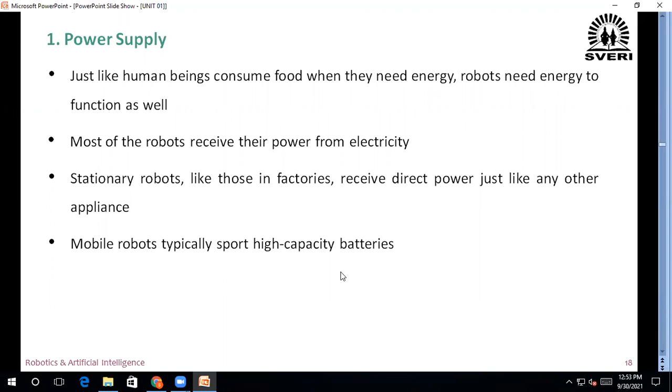Now you know that many students take part in various competitions, that is robotic competitions. Therefore, they are using these small wheeled robots, and for that they are using small batteries.

Then robotic probes and satellites are generally equipped with solar panels for harvesting energy from the sun. This solar energy is also used to drive the robots.

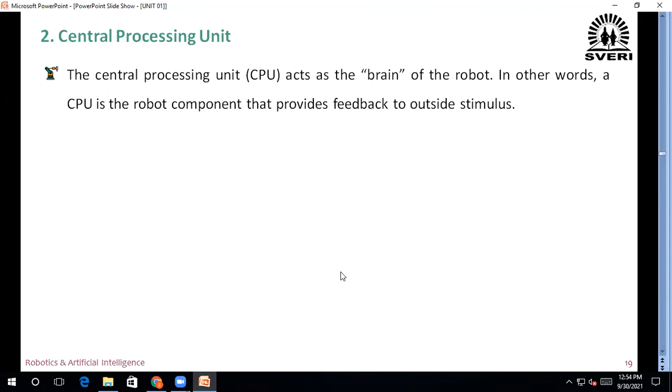Now next is the central processing unit. The central processing unit acts as the brain of the robot. In other words, a CPU is the robot component that provides feedback to outside stimulus. All organisms function and survive by using feedback.

It's what causes us to whip our hand away after we have touched a hot stove. The CPU in a robot takes in environmental data using sensors and then calls on its programming to perform the appropriate action.

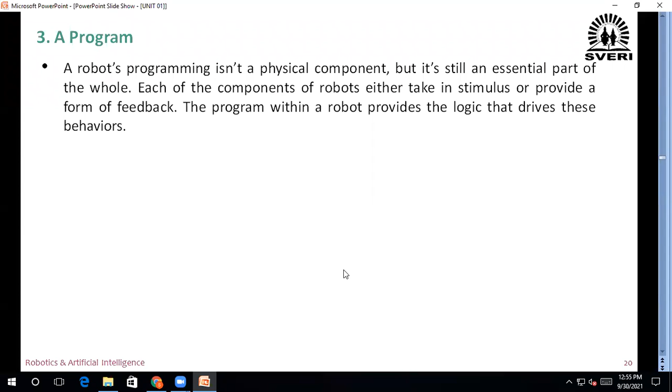A robot's programming isn't a physical component, but it's still an essential part of the whole. Each of the components of robots either take stimulus or provide a form of feedback. The program within a robot provides the logic that drives these behaviors.

Including if-this-then-that functionality like in smartphones and smart homes. Robots contain logic trees that gather and analyze tasks and environmental data and then choose an appropriate response based on that stimulus. For example, if a robot approaches a steep drop off, it will back away automatically. A robotic probe exploring another world may activate a different tool depending on what its cameras and sensors detect around it.

Sensors. Sensors are the powerhouse of a robot's feedback mechanism. They act like eyes and ears to help the robot take in information about its surroundings.

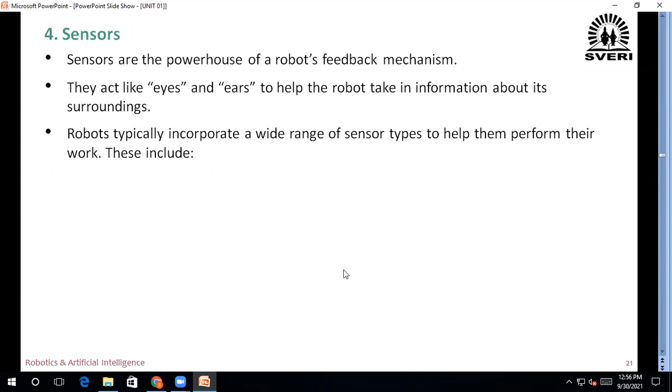Robots typically incorporate a wide range of sensor types to help them perform their work. These include light sensors, sound sensors, temperature sensors, contact sensors, proximity sensors, distance sensors, pressure sensors, and positioning sensors. Therefore, these are the different sensors which are used in the robot to sense different things, that is light, sound, temperature, contact, proximity, distance, pressure, and position.

Now actuators. Actuators means driver. If sensors are the eyes and ears of the robot, its actuators function like muscle. Actuators are small motors attached directly to the structure of the robot that facilitate movement.

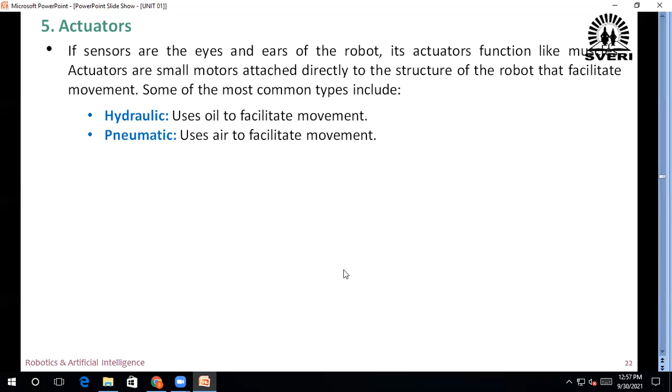Some of the most common types include hydraulic, which uses oil to facilitate movement; pneumatic, which uses air to facilitate movement; and electric, which uses electric current and magnets to facilitate movement.

Some of the simplest robots consist of little more than an arm, an actuator, and a tool for performing work. More complex robots may use actuators to kick treads, wheels, or even legs into motion.

When robots are developed to complete delicate tasks that require fineness and accuracy, stepper motors are used to achieve movement in specific intervals with repeatability. Use of stepper motors is one of the reasons why robotic assembly took off in such a huge way in the 1960s and never slowed down.

Now end effectors. End effectors means gripper. The terms effector and end effector are sometimes used interchangeably. Both terms refer to the tools aboard the robot, that is, the tools that perform the actual work and interact with the environment or a workpiece.

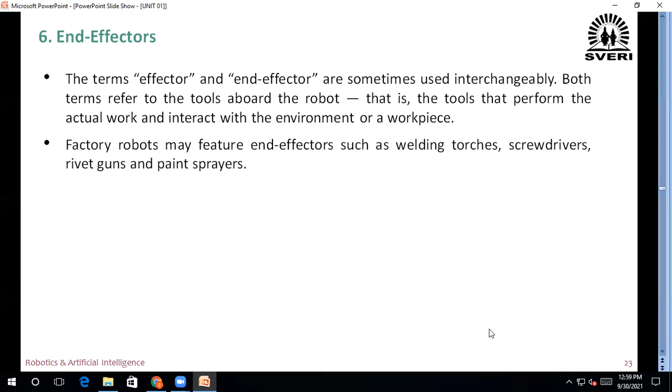Factory robots may feature end effectors such as welding torches, screwdrivers, rivet guns, and paint sprayers. Mobile robots usually have manipulators and grippers for lifting objects or disposing of dangerous ordnance. Robots like those dispatched to other planets may carry shovels, drills, hammers, cameras, lights, and other analytical implements.

From simple to complex, effectors allow robots to carry out their specific tasks with precision.

In general, the first specification is axis. A robot axis represents a degree of freedom. A degree of freedom determines an independent motion of the robot. The more axes a robot has, the more flexibility or movement it will be capable of.

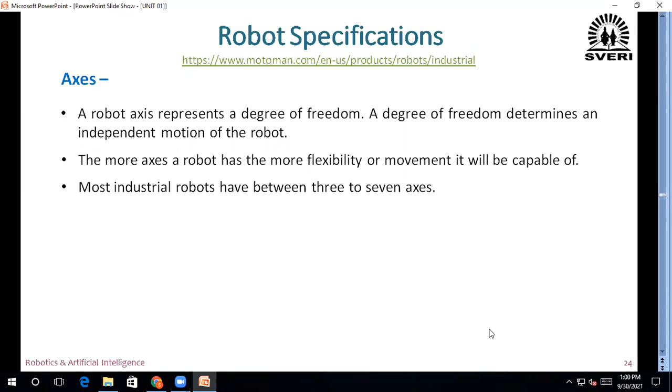Most industrial robots have between 3 to 7 axes. It is important to consider the number of axes when selecting an industrial robot, as it will determine its range of motion.

6-axis robots tend to be the most common since they have a high level of flexibility, making them capable of performing complex applications. More simple applications may require less range of motion, which is why the 4-axis Fanuc M-410iC/185 is popular for basic robotic palletizing tasks.

When you will see the actual figures, then you will understand — we'll see this website afterwards.

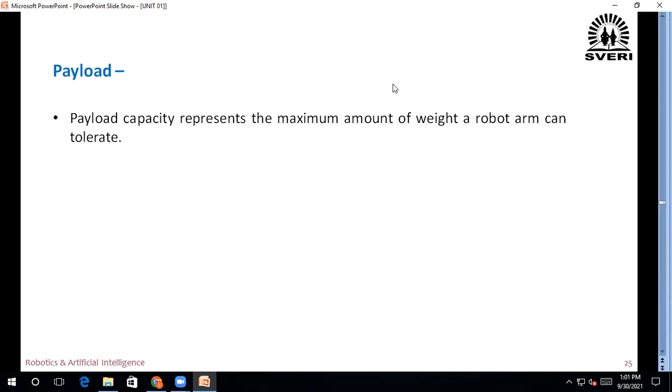Now payload. Payload capacity represents the maximum amount of weight a robot arm can tolerate. Robotic payload is typically expressed in kilograms. Payload varies greatly among industrial robots, from 0.5 kg to over 1000 kg.

Considering the workpieces as well as the weight of any end effectors integrated with the robot will help guide you to selecting a robot with an appropriate payload capacity. For instance, if your application involves palletizing boxes, the Fanuc R2000iB/125L would be an ideal option with its heavy lifting capabilities.

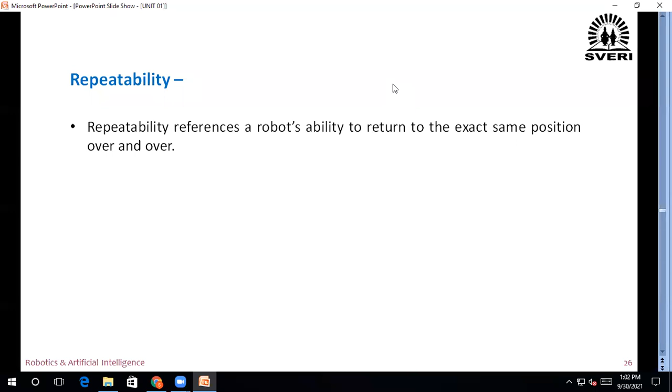Repeatability. Repeatability references a robot's ability to return to the exact same position over and over. In other words, it defines how precise a robot may be. Repeatability is expressed in millimeters, plus or minus, to determine the robot's margin of error.

The Fanuc M20iA has a repeatability of plus minus 0.08 mm. This means its arm will fall within 0.08 mm of the programmed position with each cycle run.

Now reach. A robot's reach may be broken down into two types: vertical and horizontal. Vertical reach determines the maximum height a robot arm can obtain when extended upward from its base. Horizontal reach defines the maximum distance obtained from the center of the robot base to its wrist. A robot's reach can determine the scope of its work envelope.

Now next is robot mass. Robot mass is the weight of a robot. It is usually expressed in kilograms and references the weight of the robotic manipulator only. This can be important to consider if you are looking to mount a robot on a shelf, table, or overhead.

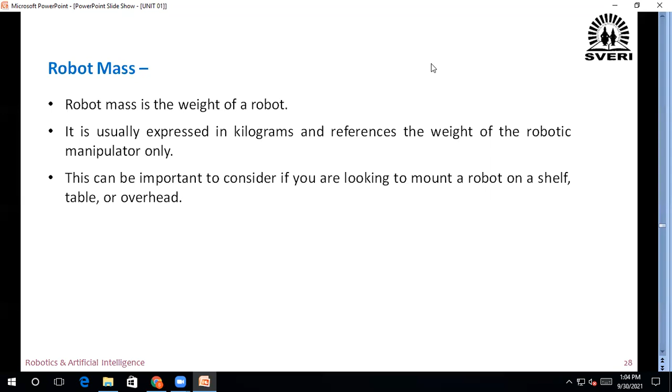The next is structure. Structure refers to the type of robot. There are many types of industrial robots, with the most common including articulated, delta, SCARA, and gantry. Gantry type of robot means crane type of robot, overhead crane. This specification is important because it determines a robot's work envelope and functionality. Articulated robots are generally the most commonly used in welding automation and robotic assembly.

Now this is the front view of a typical robot. In this diagram, the different dimensions, that is horizontal and vertical dimensions of the robot, have been shown. Now this is the base of the robot. Here, maybe the robot is standing, or it is kept on the floor.

Therefore, from the floor, from the base to this pivot point, the distance is 400 mm. From this pivot point to the next pivot point, the vertical distance is 600 mm. And from this pivot point to the center of the arm, the distance is 120 mm. Now this white color you may be observing shows its work envelope, that is this robot arm.

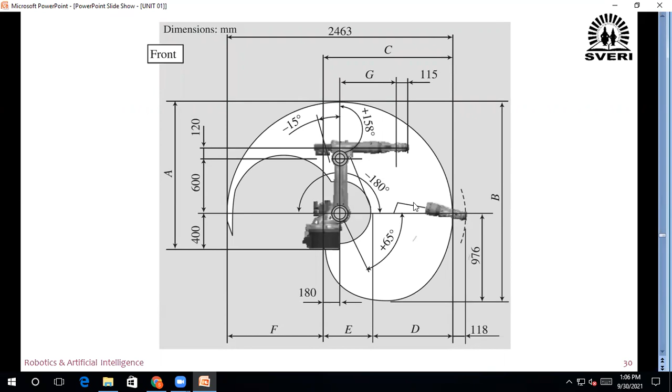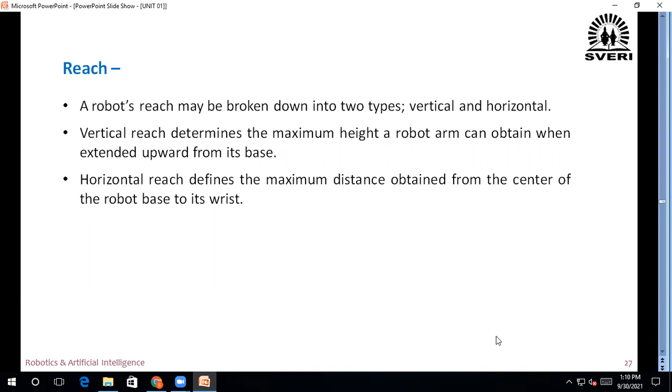Now we'll see this link: www.motoman.com/en-us products.

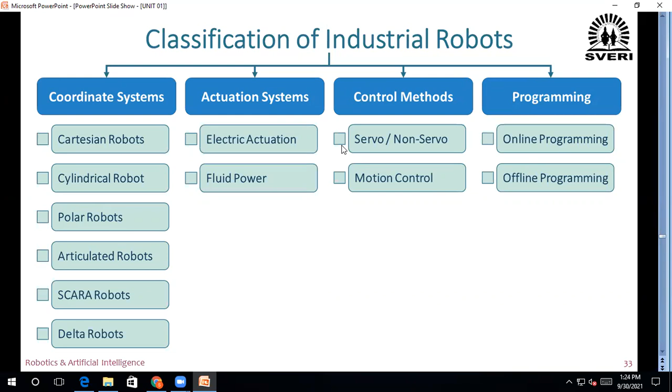Classification of industrial robots. Today we'll see classification according to coordinate system. First is Cartesian robots.

Cartesian robots means the arm of the robot can move along X, Y, and Z axis. See that this is the base of the robot, this is the horizontal arm, this is the pillar of the robot. This arm can move up along this Y axis, and this whole base moves horizontally along the X axis direction. We are going to see the videos also.

Cartesian robots, also called linear robots or gantry robots, are industrial robots that work on three linear axes using the Cartesian coordinate system X, Y, Z, meaning they move in straight lines on three axes: up and down, in and out, and side to side. Up and down means along the Y axis, in and out means along the Z axis, side to side means along the X axis.

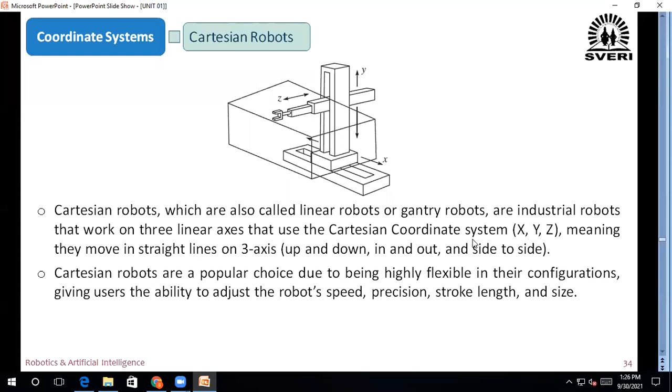Cartesian robots are a popular choice due to being highly flexible in their configurations, giving users the ability to adjust the robot's speed, precision, stroke length, and size. Cartesian robots are one of the most commonly used robot types for industrial applications and are often used for CNC machines and 3D printing.

This is nothing but Cartesian robot. Their arms are moving along three linear axes X, Y, and Z. There are applications you will find in CNC machines and in 3D printing. Now we will see some YouTube links to understand what is meant by Cartesian robot.

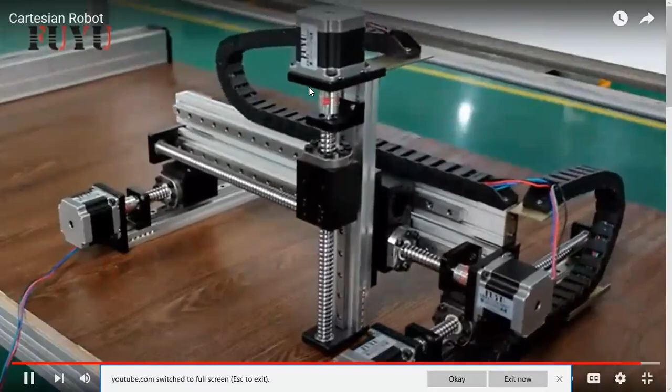See that this Cartesian robot is there, how this is moving. See that this up and down, now it is going up, it is coming forward.

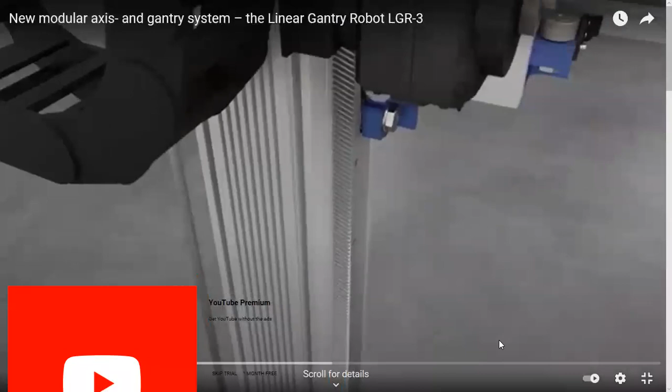Now see that this is Gantry robot. Gantry means crane type robot. See how this robotic arm moves along the x-y axis, it will move vertically also. This gripper is there, or end effector. Rack and pinion drive enables the transmission of large forces. This payload can carry up to 250 kg. This gripper.

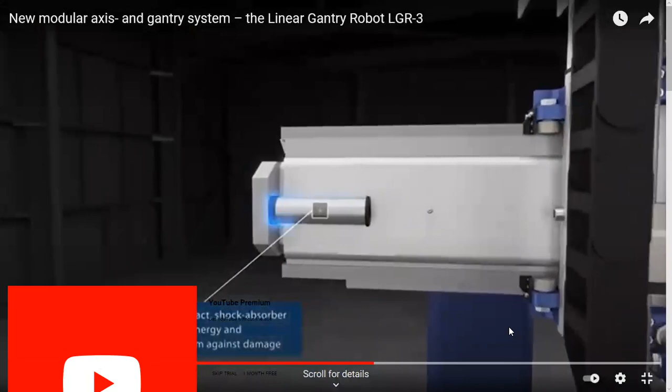Length of the horizontal axis, it can be extendable. Various constellations of carriage types, you can mount different carriages. Extremely sturdy with low wear due to hardened guide rails. Dovetail guide enables flexible positioning. High energy efficiency by use of planetary gears.

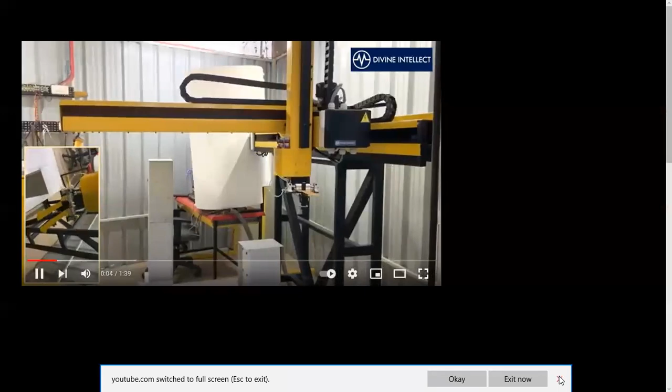Now we will see another example. Cartesian robot with pick and place application. Here in the box it has been shown what is actually done. Again it is picking up another box, again it is placing. This is a pick and place type of robot. Cartesian robot with pick and place application.

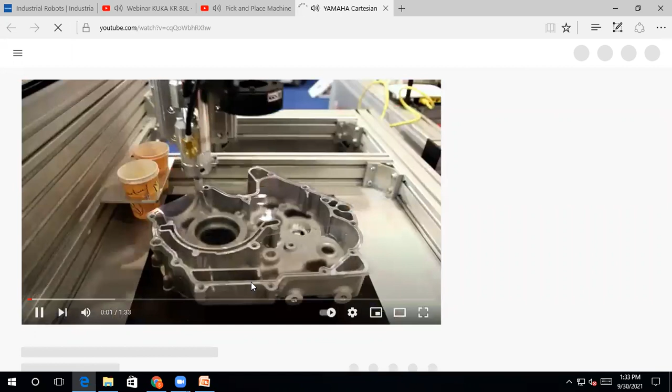Now next, see that this is Yamaha robot, Cartesian robot. See how it is moving along the x-axis, horizontally like this. Then this arm is moving along the y-axis. See that how this base is moving like this along the x-axis. This movement is the z-axis and vertical movement is the y-axis. See how this robot is used.

Now next link we will see. See that now these two arms are there. X, again it is coming out. Again we will see. See that this is Z, vertical is Y, and this is X. Two arms are there, therefore this is known as a double arm robot. See that it is used for picking up and placing. Pick, place. Pick, place. Pick, place.

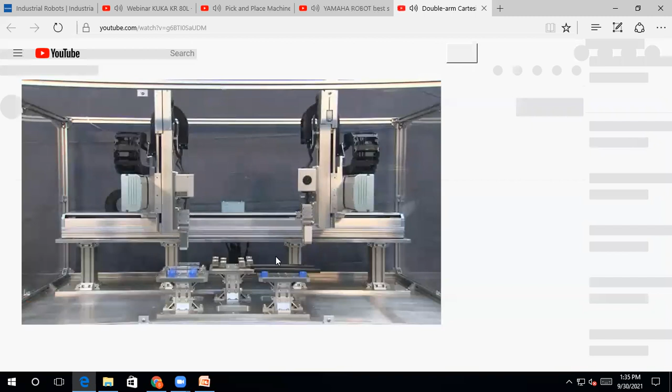Now another we'll see here. Is there a link or not? Kuka linear robot, we'll see Kuka. Is there a problem or what?

See here, Kuka. This is the gantry robot, crane type robot. See that this is the X axis, this is the Z axis coming forward. Axis 1, axis 2, coming out and going inside. Some problem.

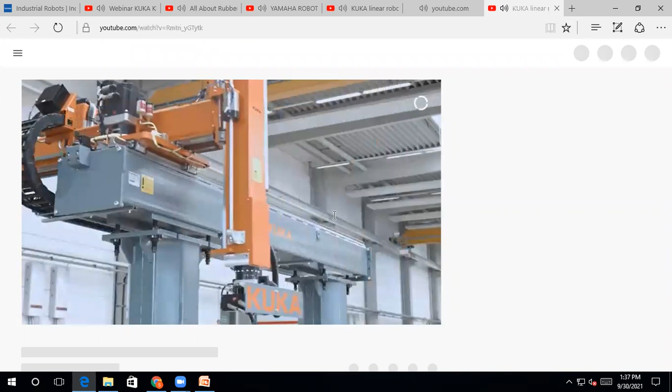Okay, now I will open this in Chrome so that... okay, now we have seen this Cartesian robot. Again I will check. Let it, I will type it here. Cartesian robots.

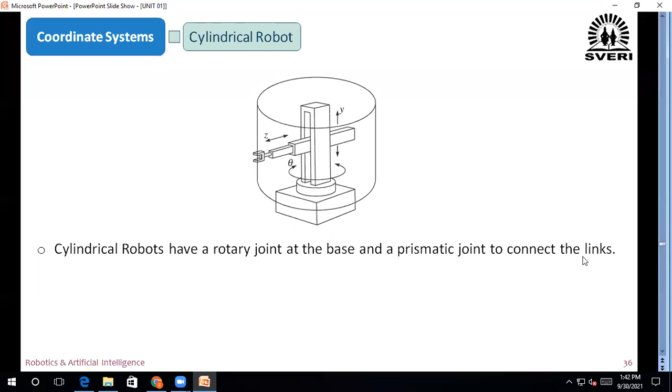Now, cylindrical robots have a rotary joint at the base and a prismatic joint to connect the links. The robots have a cylindrical shaped work envelope which is achieved with rotating shaft and an extendable arm that moves in a vertical and sliding motion. See that this is the extended arm which is moving, sliding, and also vertical motion. This base or vertical pillar is there, rotating at the base.

Cylindrical robots are often used in tight workspaces for simple assembly, machine tending, or coating applications due to their compact design.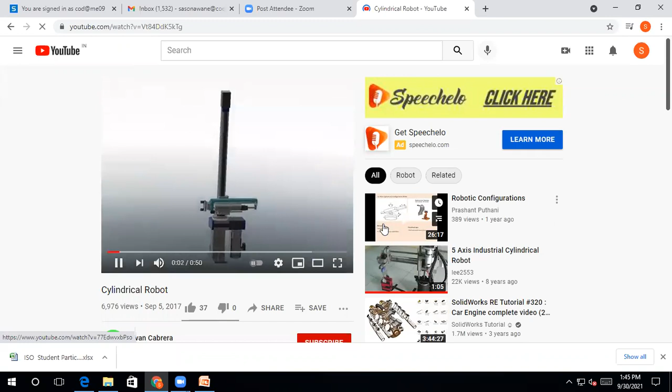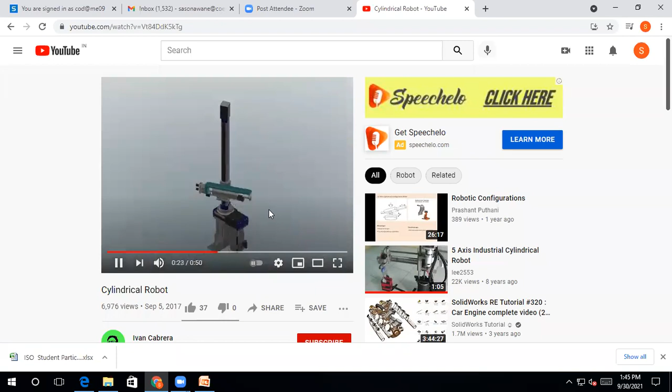See that this cylindrical robot is there. This arm is moving up and down. This vertical pillar is rotating in a cylindrical manner so that the end of the arm will trace a cylinder. See that this is the arm, this is the gripper. See that it is rotating also. It is going inside, coming outside. This arm can move up and down. That's why this is known as cylindrical robot.

This 5-axis cylindrical robot we will see. Same is there, I think. I'll just see this cylindrical robot having 3 degrees of freedom.

See that this pillar will rotate. This arm can move, it will go inside, it will come outside, and this arm also moves up and down. See that it is now coming down, going up. This is the end effector.

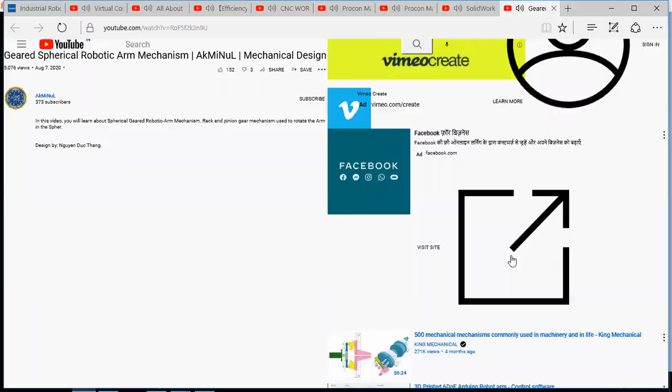We will see polar robot now. Geared spherical robotic arm mechanism. I will see here.

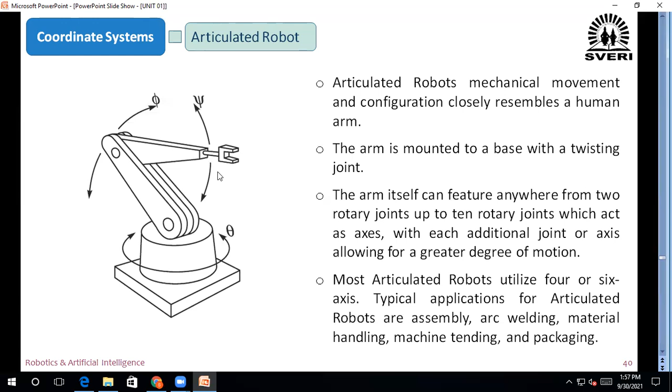Most articulated robots utilize 4 or 6 axes. Typical applications for articulated robots are assembly, arc welding, material handling, machine tending, and packaging.

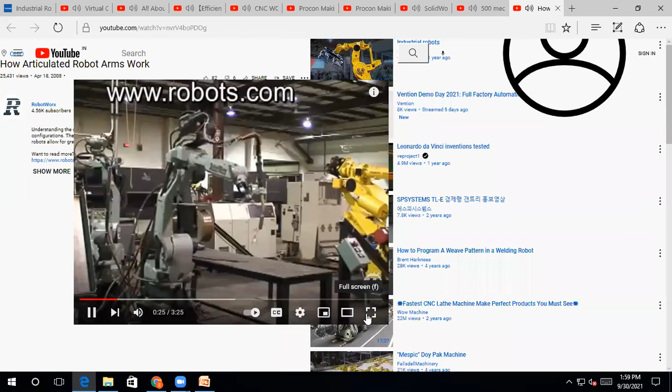One rotary joint. So this is second rotary joint, this is third rotary joint. At the base also twisting is there, here also twisting is there. Twisting rotary joint. Yeah, this is also rotating.

One rotation means one axis, remember. But how much axis this robot is having? 1, 2, 3, 4, so 4, this is 5. One rotation means one axis, remember. One, two, three, 4, 5, 6. This is 6 axis articulated robot.

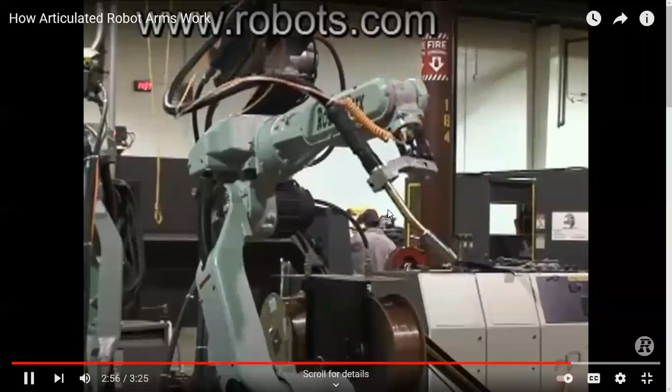Then it is rotating. Articulated robot arms.

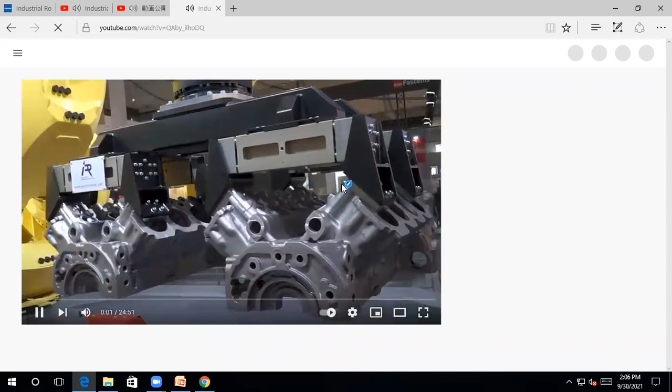We will see now this video. This is a big video, but we'll see only part of it. See that how this robotic arm is there, which is almost 2.3 ton. This robot can carry 2.3 tons payload, the biggest lifter. I think it is not working.

Articulated robot, no? Articulated robot.

We will see this small video. See that articulated robots, manufactured by this Fanuc company. Industrial robots for flexible handling tasks and precise parts processing.

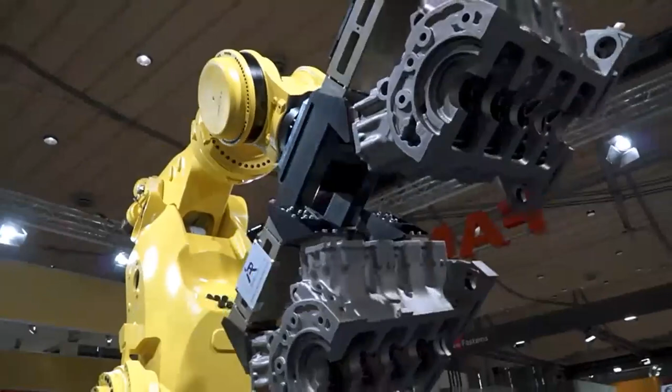The biggest lifter in the range, ideally suited to heavy weight material handling applications that require an even stronger wrist. This machine will easily lift and position an entire car or load bulky set castings onto machine fixtures. See that this Fanuc.

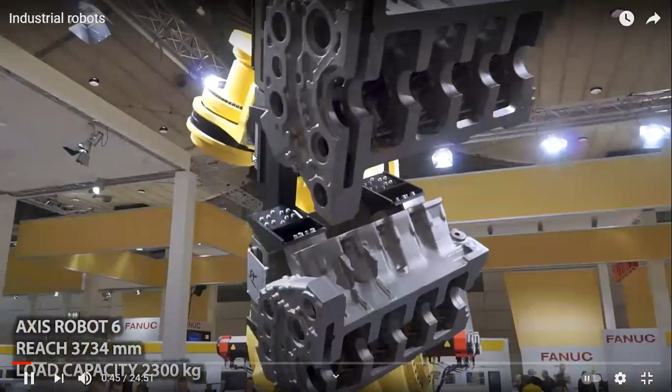Fanuc is the company which manufactures the robot. This is articulated robot. This is the wrist, known as wrist, similar to our human arm. Articulated robot is similar to our human arm. Our wrist is also rotating, therefore this is also rotating. See that?

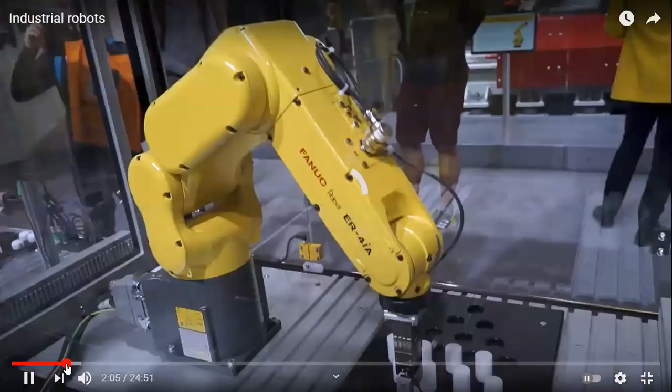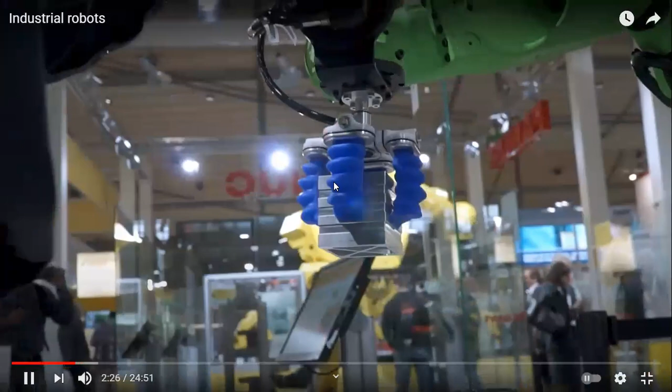This is international robot exhibition in Hanover. See that this robot, it is picking and placing, picking, placing, repeatedly. See that picking. This blue color part is known as gripper.

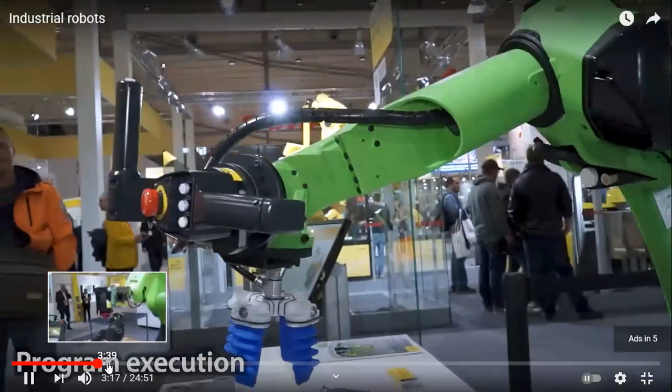Ad is there. See that this robot: this vertical pillar, this horizontal arm, this is wrist, this is end effector. Programming is going on.

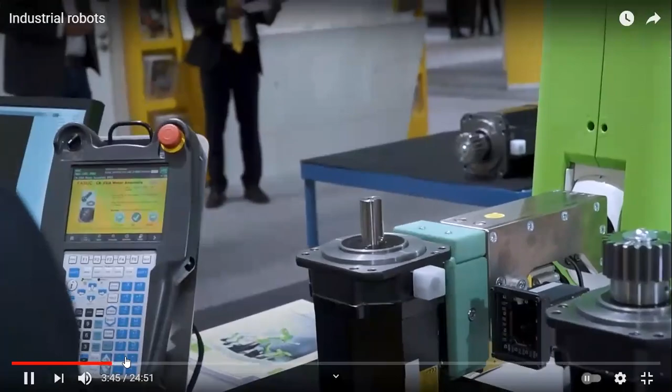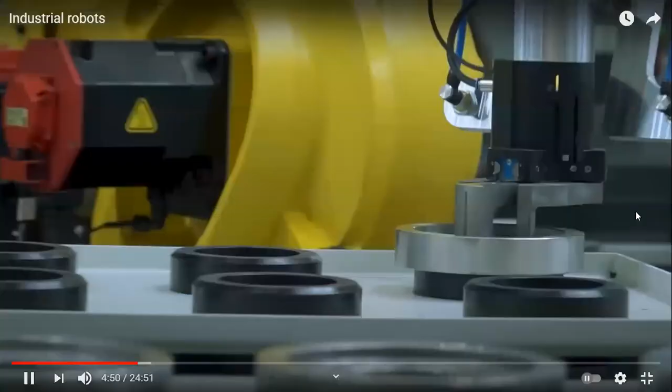Now see this robot, how it is used in CNC machines for taking out machine component. Fanuc robot controlled. See that this robot again, how it is moving, how it is picking and placing. See that it is removing that big part from the wall and keeping it on the table.

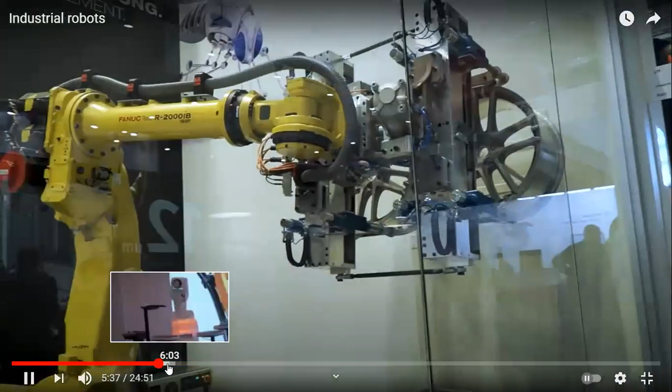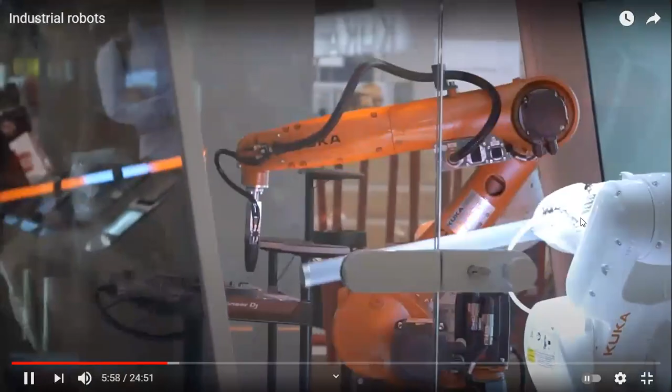Now this KUKA is another company which manufactures the robot. See its robots, articulated robots.

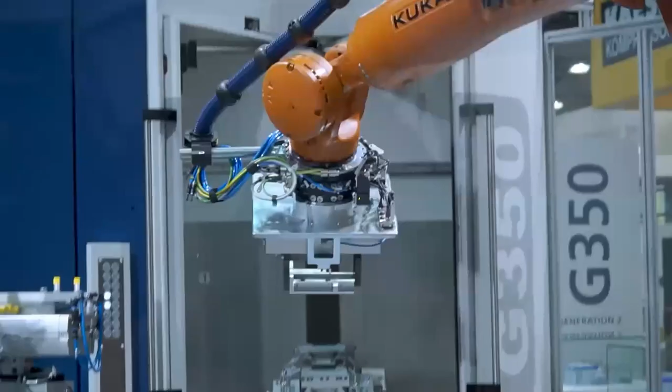See now this robot is lifting part from the CNC machine and keeping it on the table.

Hello? Hello? Whether you are listening? Yes, sir. Hello? Yes, sir. Pranay? Yes, sir. Hello? Yes, sir.

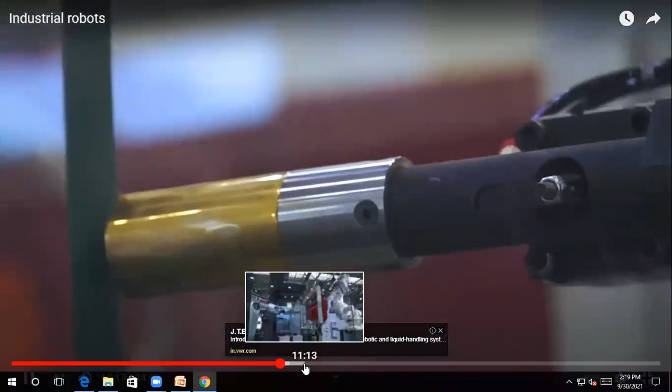Okay, now I will take the next robot. SCARA robot.

SCARA is an acronym that stands for Selective Compliance Assembly Robot Arm or Selective Compliance Articulated Robot Arm. SCARA robots function on three axes, X, Y, and Z, and have a rotary motion as well. They excel in lateral movements and are commonly faster moving and have easier integration than Cartesian robots. Typically, SCARA robots are used for assembly and palletizing as well as for biomedical applications.

I will see it separately. SCARA robots.

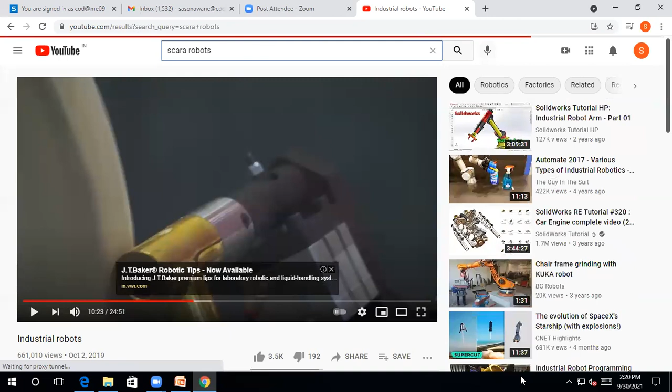See this SCARA robot, we'll see. It is manufactured by Fanuc. High-speed pick and place with Fanuc SR-3iA SCARA robot. See that SCARA robot, how it is picking and placing. See here.

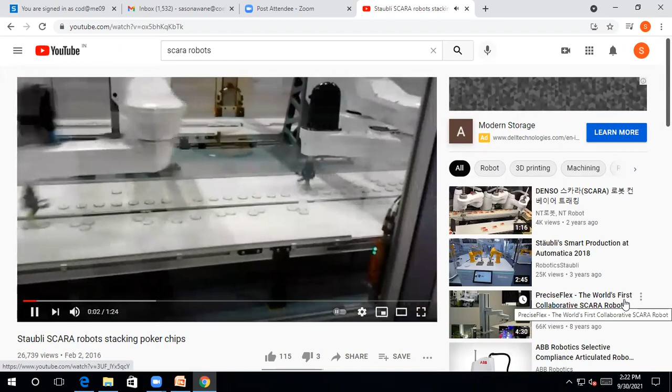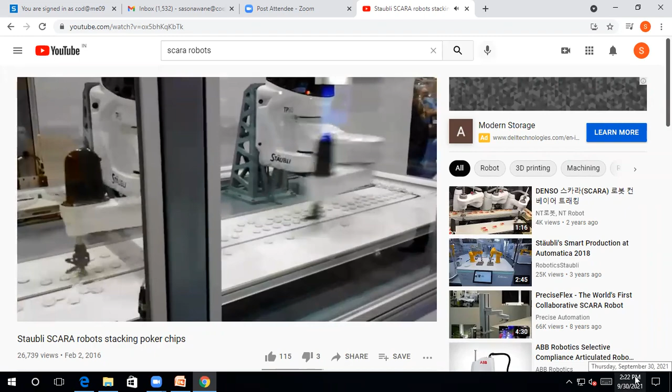Now next, see that this is also SCARA robot. Stacking poker chips. Therefore, this is nothing but a SCARA robot.

Now next robot we'll see: Delta robots. Delta robots or parallel robots possess three arms connected to a single base. See that: 1, 2, 3 - these three arms are there, connected to the single base, which is mounted above the workspace.

Delta robots work in a dome shape and can move both delicately and precisely at high speeds, due to each joint of the end effector being directly controlled by all three arms. Delta robots are often used for fast pick and place applications in the food, pharmaceutical, and electronic industries.

We'll see the animation of Delta robot. Delta robots. See this.

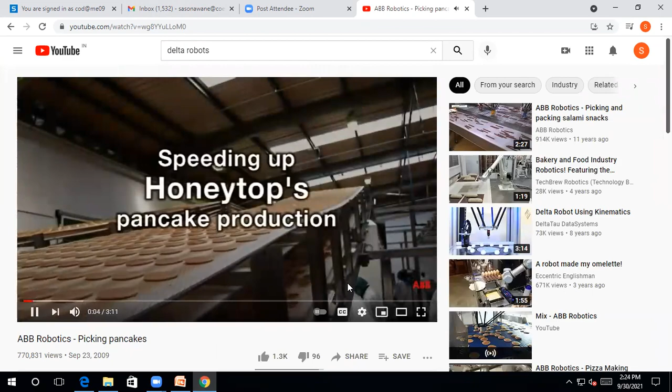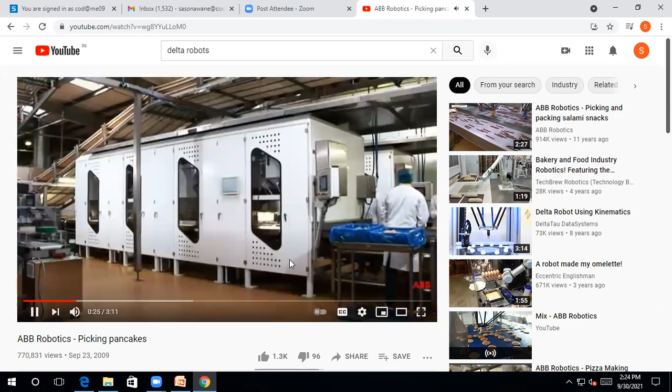We'll see a small video: speeding up Honeytop's pancake production, how ABB Robotics are helping Honeytop Specialty Foods Limited. ABB is the robotic manufacturing company from Sweden. Here inside, Delta robots are there.

Reduced labor cost, improved health and safety. See that how these Delta robots are working.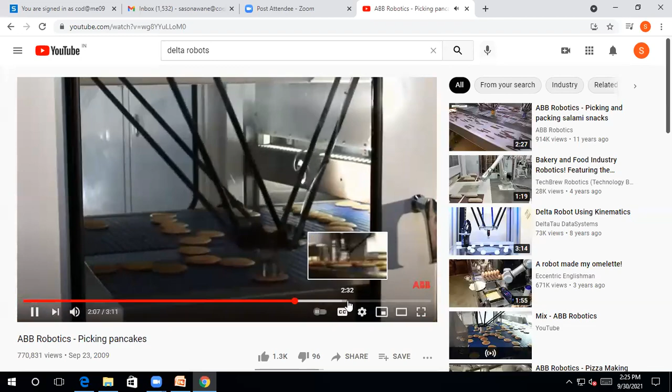Okay, we'll see another robot. Delta robot kinematics. See that this.

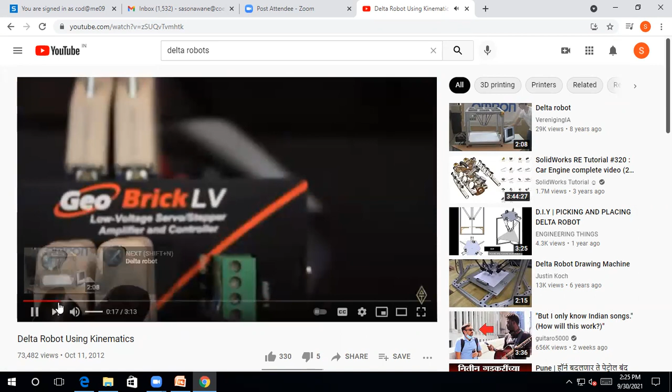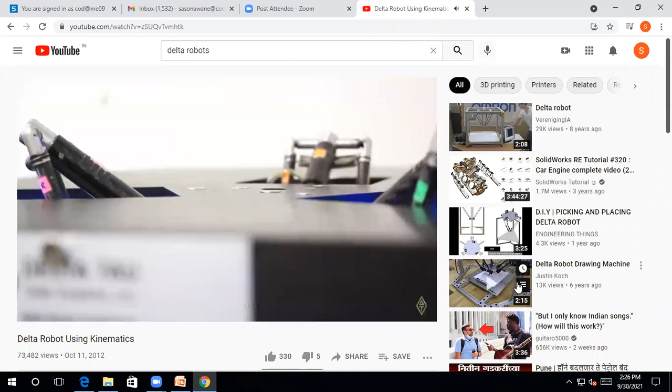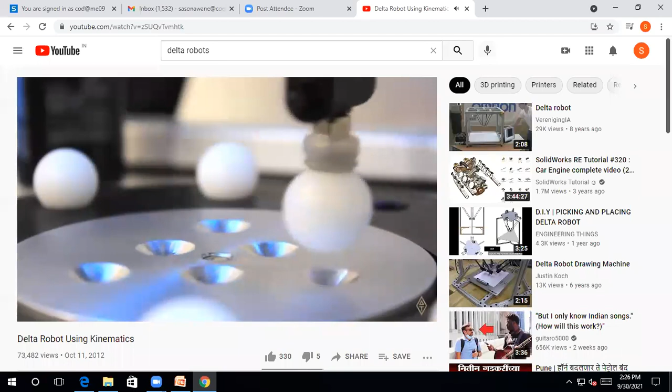See that this Delta robot is there. See that now how this Delta robot is working. See that how Delta robot is working. Now this is the Delta robot.

Now this next is actuation system. This we'll see in the next lecture. Now we'll stop here. Please enter your numbers.